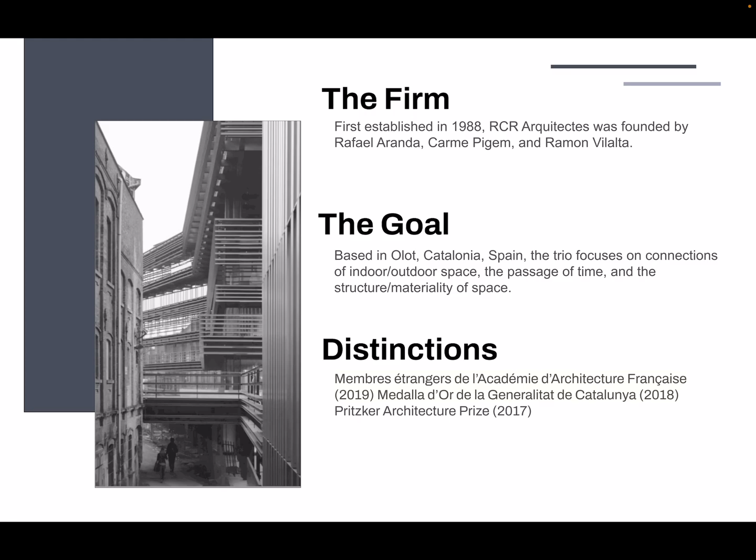Competing to design Ghent, Belgium's new library, RCR had to include meeting rooms, offices, a cafe, a lab, and a media center. The new library would play a vital role in reviving the run-down neighborhood, turning it into a gathering place for locals and tourists alike.

De Krook gets its name from the Scheldt River, the stream that reaches its lowest point here as it weaves and bends throughout the city, taking the Dutch word for river bend, which is De Krook. Other areas of note are the historical Ghent neighborhood that borders the library, the newly renovated Winter Circus, and the Ghent University across the water.

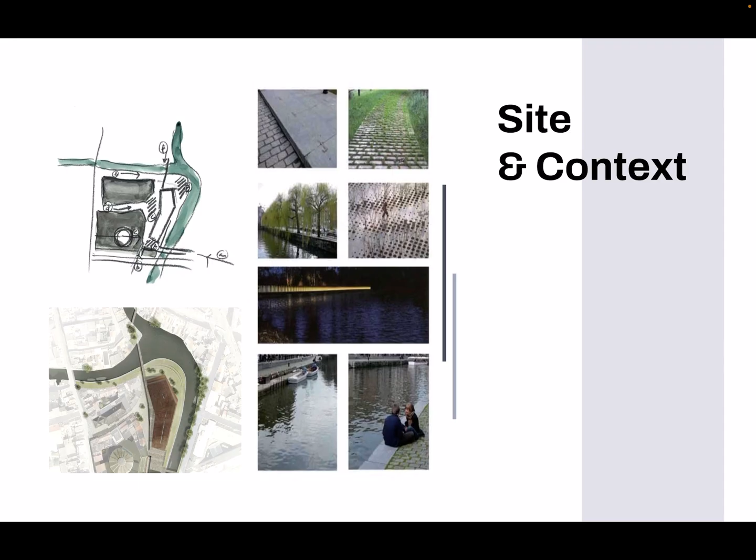Located in what used to be an inaccessible, demolished area, De Krook has become a focal point of the city, sowing the seeds for a living laboratory of sorts by uniting the new public library and the IMEC Center for Digital Innovation in a single building.

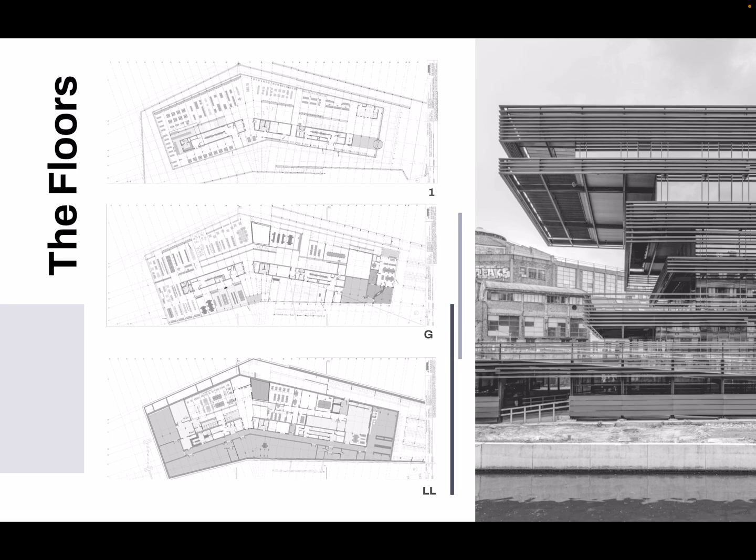The new library consists of 7 floors with a wide range of public and private spaces. Climate ceilings are used to both heat and cool the building, and their low temperature regime makes them incredibly energy efficient. By means of high-end operating units, visitors can adjust meeting rooms to their liking, while vacant rooms aren't heated or cooled.

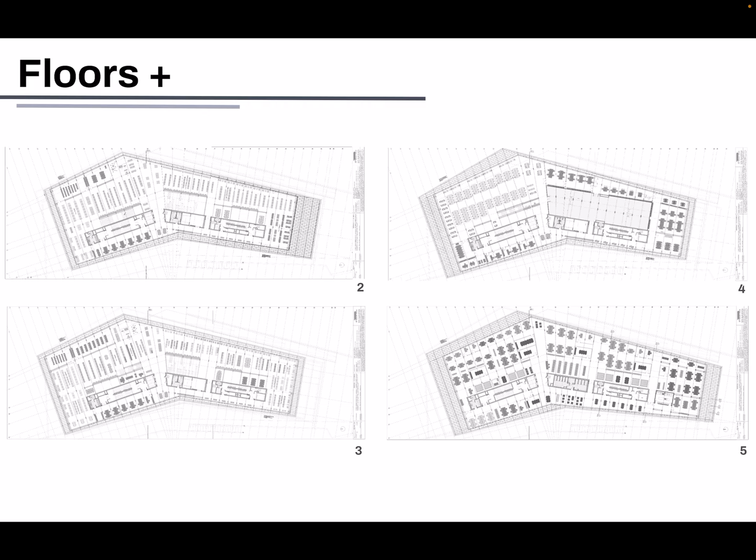The library sits on almost completely flat terrain with a gentle slope down to the south. After analyzing the site, RCR made a first and crucial decision to elevate the level of the main entrance in order to better connect the building into the urban fabric.

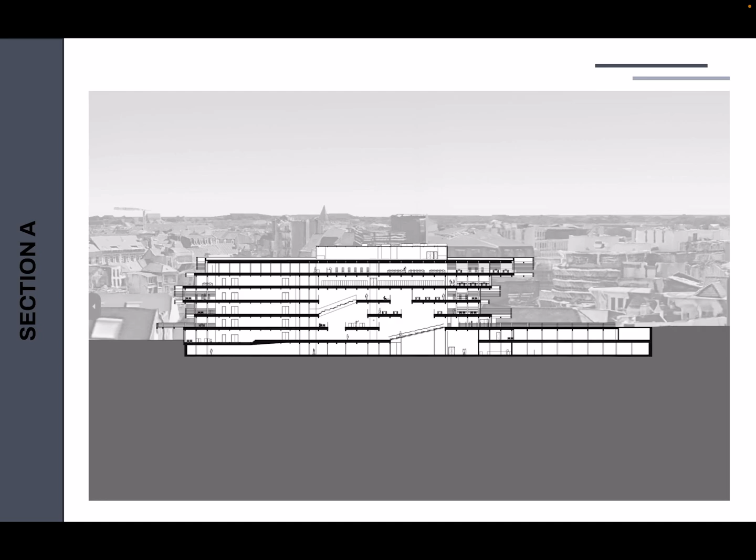Transparent and open, De Krook allows visitors to discover what this reclaimed area has to offer, with attractive views spanning both the natural and urban landscape, effectively creating both a physical and visual connection between inside and outside.

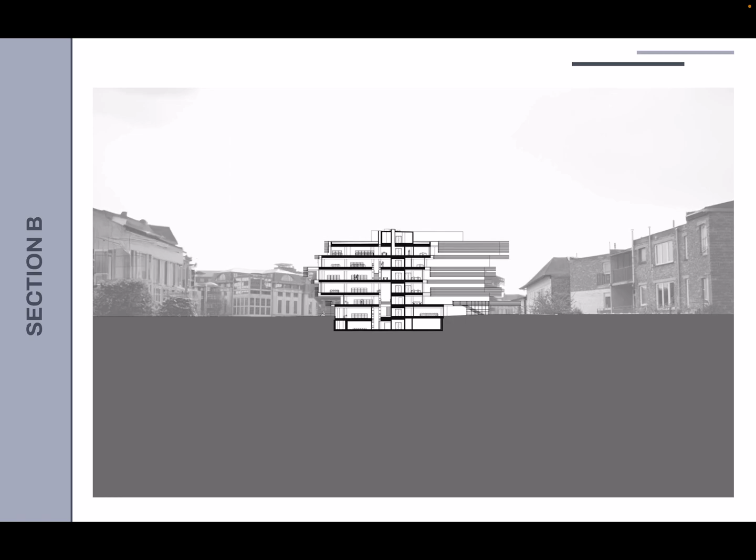The building's metal structure, a visible presence from all points, is angled along the river, following the waterline. This, as well as the library's imposing stacked structure, references the now demolished harbor, as well as the former industrial activities that once took place here.

These stacked horizontal planes also turn De Krook into a bold statement, offering a stark contrast with its historic surroundings, both imposing and yet integrated into the urban environment. Mindful of sustainability, De Krook is constructed entirely out of prefabricated metal elements, most of which were transported over water, saving the city serious traffic as well as 140 tons of carbon dioxide.

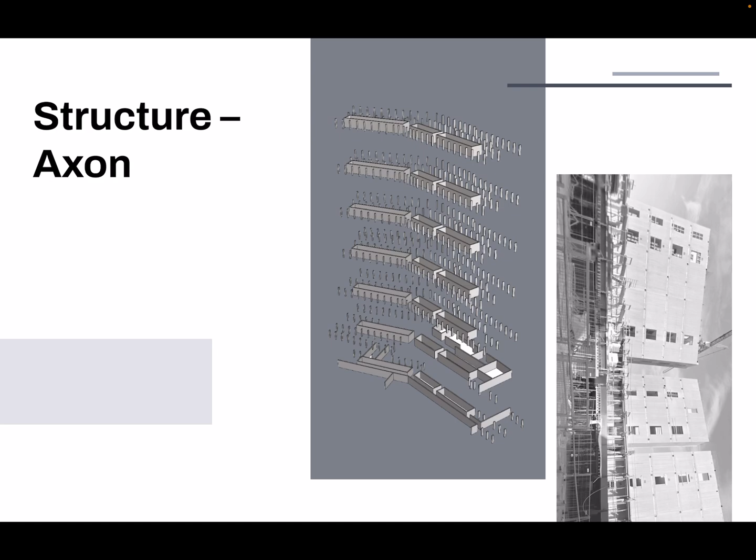Steel, concrete, and glass are the 3 main materials used in the library construction. Wanting them to act as the protagonists in the final product, RCR left them unembellished and exposed, intending to add a raw, honest approach to their design. This meant the exposed materials had to be immaculate, requiring a high sense of technical detail and precision in order to produce a controlled and pristine facade.

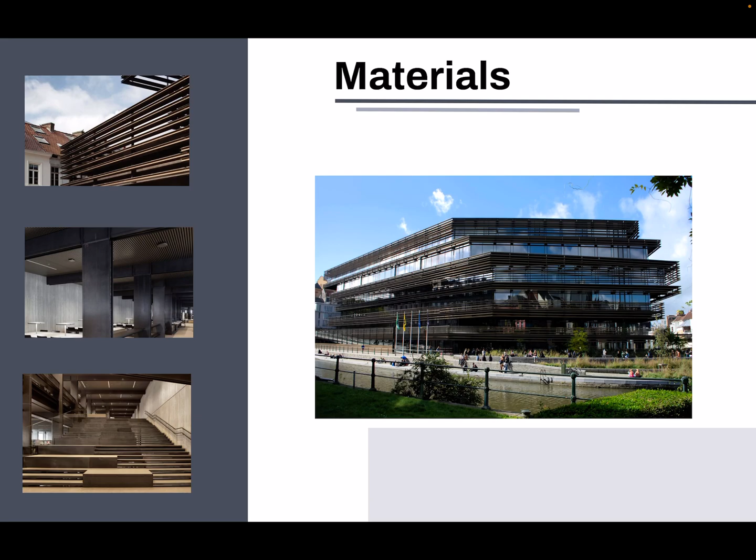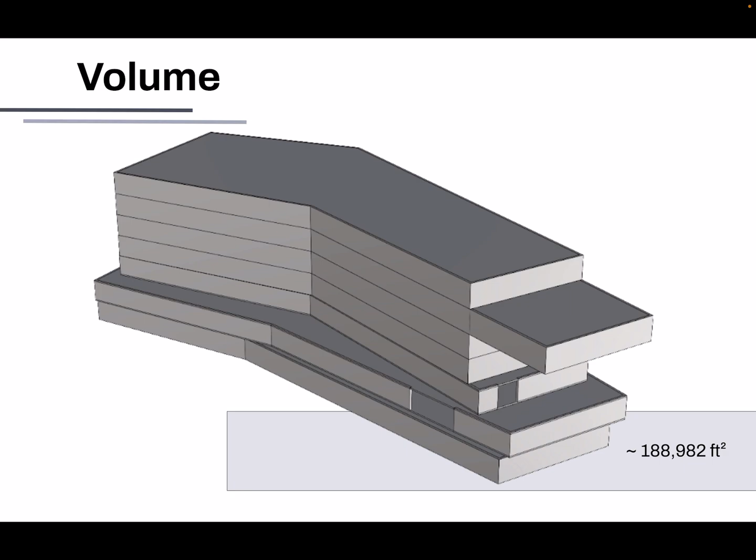Deciding to mirror the bend of the river, the firm reduced the volume of the building, which allowed for more greenery in communal areas outside. Soft, filtered light, which creates a homely atmosphere, is combined with a wide view of the city, or, depending on the floor level, the bustle of the riverside.

The aim of the design is to create a city within a city, complete with streets, squares, and public meeting places. The large staircases, coupled with the double-height agoras, create vertical voids across several floors, breaking the prominent horizontal thrust.

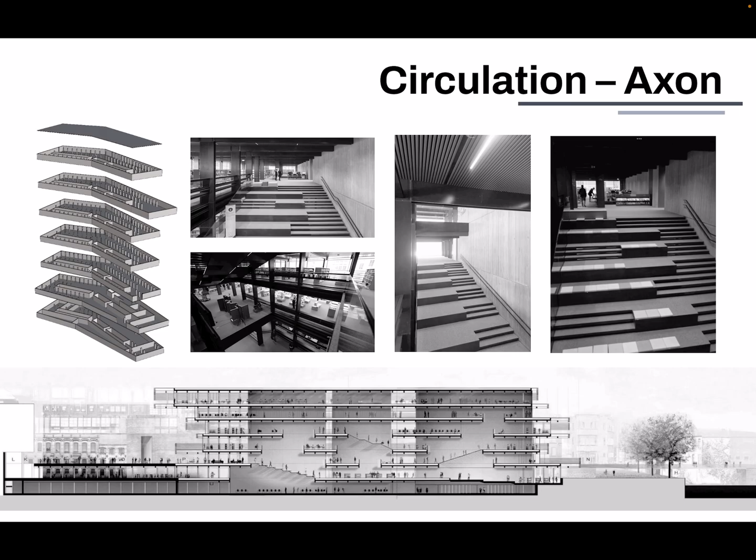Extremely accessible, De Krook is close to the city's public transport and equipped with over 700 bike racks. It even has a bike repair shop for the unlucky travelers. The majority of this access comes from the new bridges, one at each entrance of the building, encouraging people from across the river to visit the new public library.

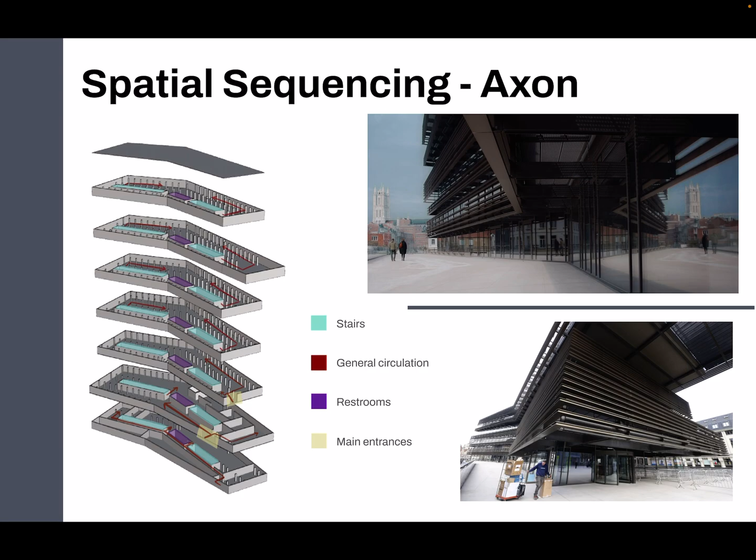With the world more digitized than ever, the role of a city library has changed. Once a place for sheer lending, a library now strives to be an oasis of peace and quiet. De Krook, outfitted with its numerous study areas, cafe, and cozy reading corners, achieves this, while also encouraging people to develop skills in workshops, experiment in the makerspace, and meet new people during lectures.

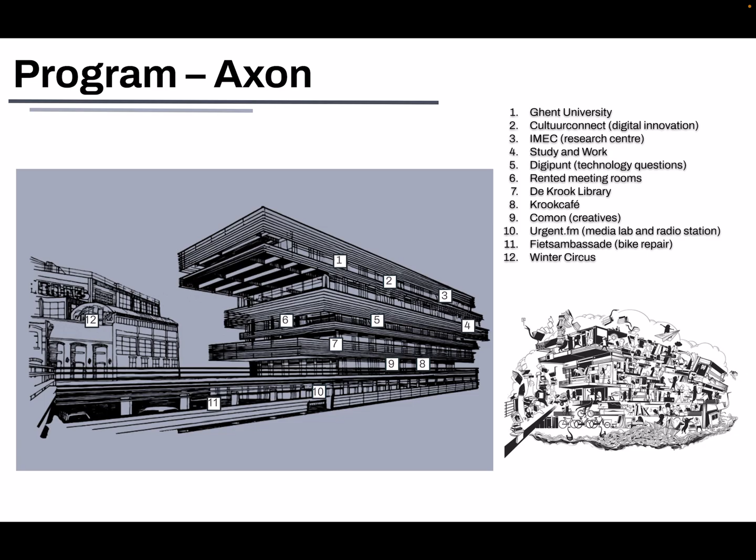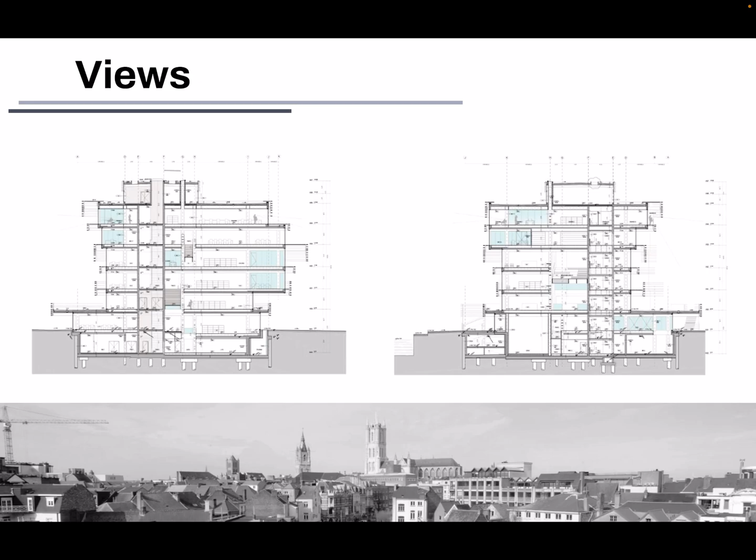The interior of De Krook is fairly dark, and coupled with the acoustic absorption of the ceiling's lamellas, the experience created is quiet and gentle. Soft filtered light streams in from the wide city views, enhanced by the library's dark atmosphere.

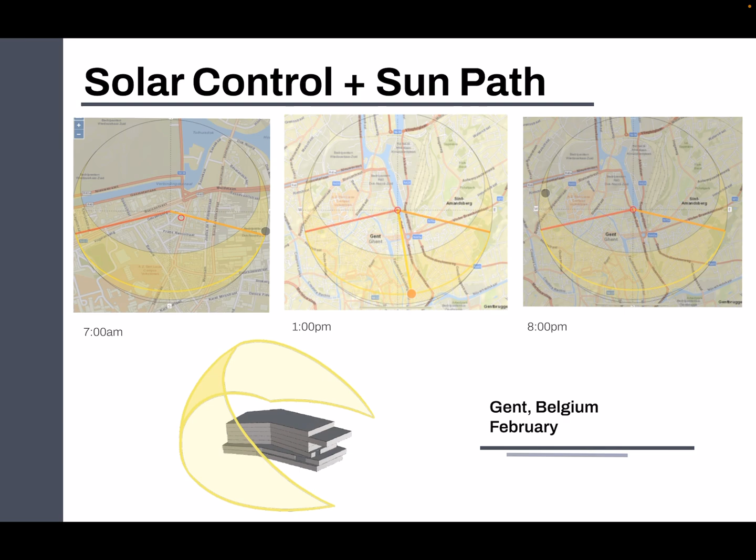Due to its position, the library has sunlight throughout the day. In order to filter out direct sunlight and achieve a soft, gentle atmosphere, RCR laced the windows with thin, parallel steel beams, which also emphasize the stacking of the structure and the flow of the river.

All artificial lighting is based on LED technology, with the outdoor lighting regulated to switch on and off at certain times. The lighting requirements were very specific. They couldn't be too bright and had to match the facades as well as be functional and aesthetic. In 2023, 6 years after construction, solar panels were installed on the roof.

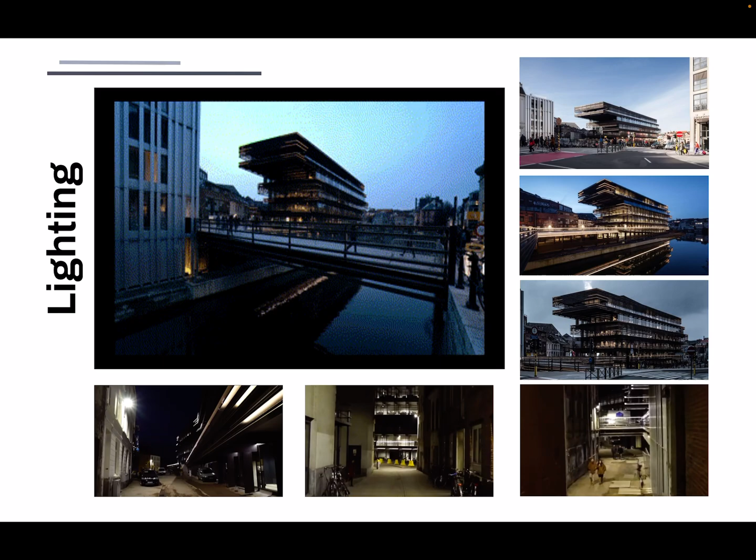Overall, we enjoyed researching this library and learning how the architects approached the site and referenced it in their design. They met the city requirements and succeeded in creating a welcoming, collaborative space and have given us many ideas of how to approach the Clifton Library. We can definitely incorporate their use of sustainable materials as well as how often they related the entire structure to the surrounding landscape. Thank you.